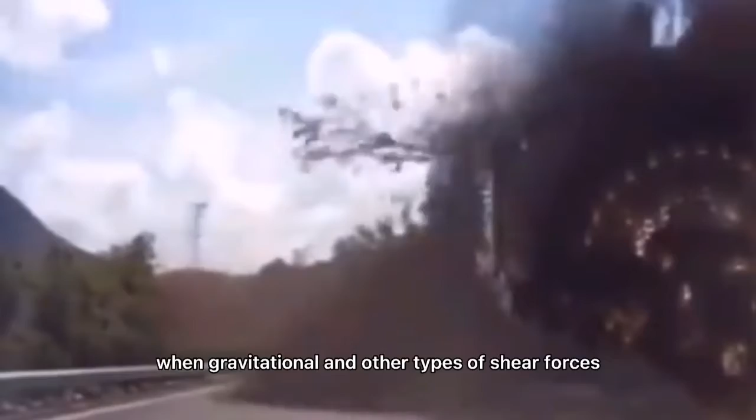Hi, my name is Nasamhana binti Sabri, and we will show you a video about landslide. A landslide, also known as a landslip, is the movement of a mass of rock, rubble, earth, or soil downslope. Landslide can occur when gravitational and other types of shear forces within a slope exceed the shear strength of the materials that made up the slope.

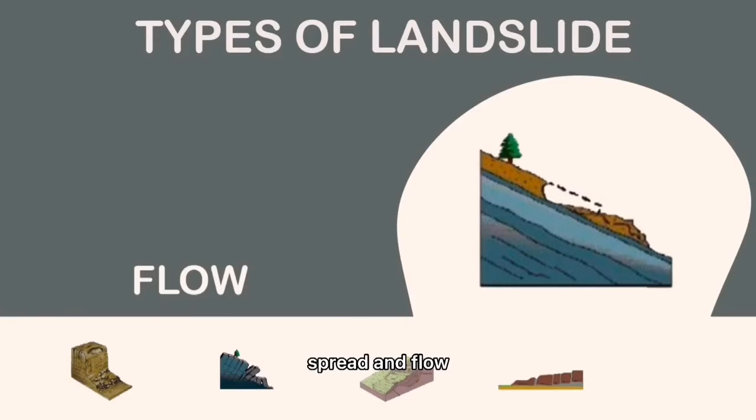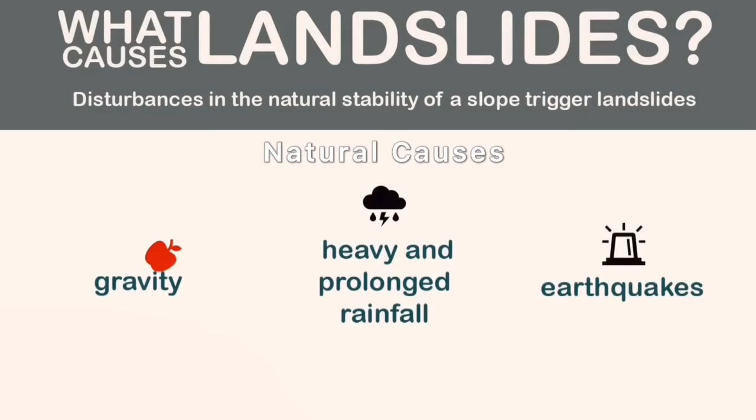Types of landslide: fall, topple, slide, spread, and flow. What causes landslide? Disturbance in the natural stability of a slope triggers landslide. There are two causes of landslide: natural causes and human causes. Natural causes: gravity. On steeper slope, gravity is more powerful.

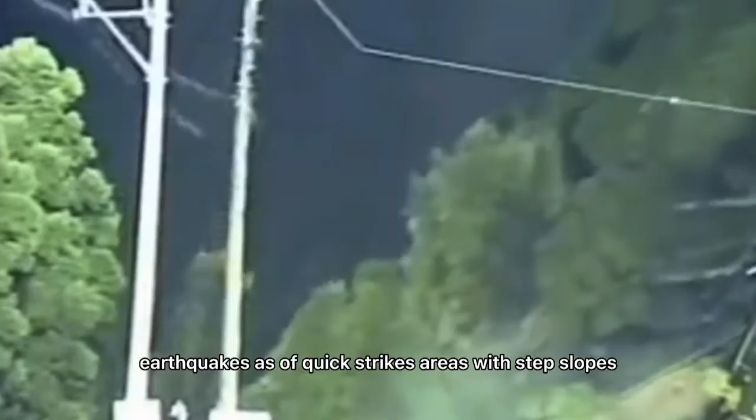Heavy and prolonged rainfall. Landslides are more likely to occur when there is a zone of vulnerability created by the storm and water level rises, making some slope unstable. Earthquakes. As earthquake strikes areas with steep slopes, the soil sometimes slips, resulting in landslides.

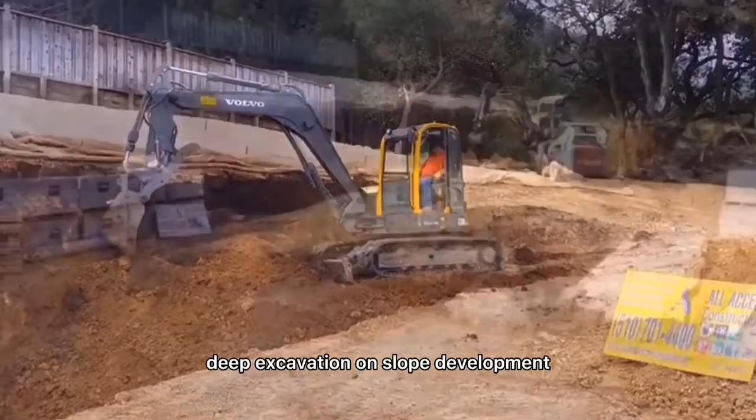Anthropogenic factor or human causes. Inadequate drainage system. Natural drainage lines on slope are blocked by contour bunding used to prevent soil erosion, but without adequate surface drainage of excess stormwater, landslides become more likely. Deep excavation on slope. Development activities such as building construction and cut-and-fill structure cause natural slope to be changed, which contribute to critical slope vulnerability.

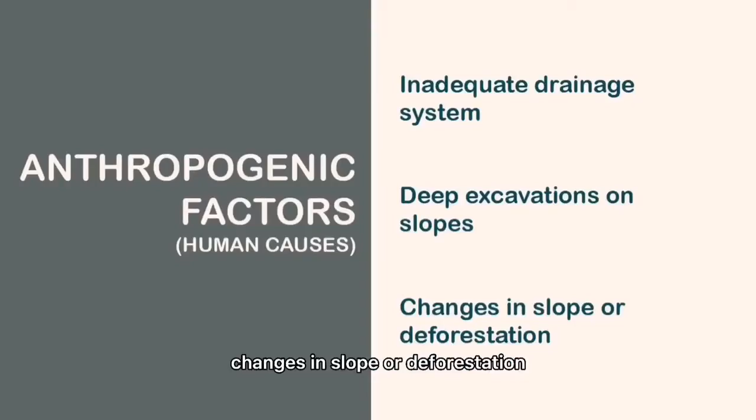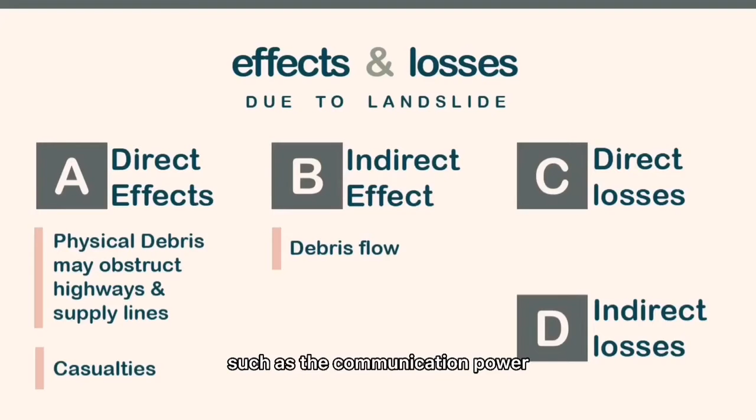Changes in slope or deforestation. Improper land use practices like heavy tilling, farming practices, and settlement patterns have led to creep and the loss of toe support. Effect and losses due to landslides. Direct effects. Physical debris may obstruct highway and supply lines, such as telecommunication, power, water, and other utilities. Casualties. Death and accidents to human and animals.

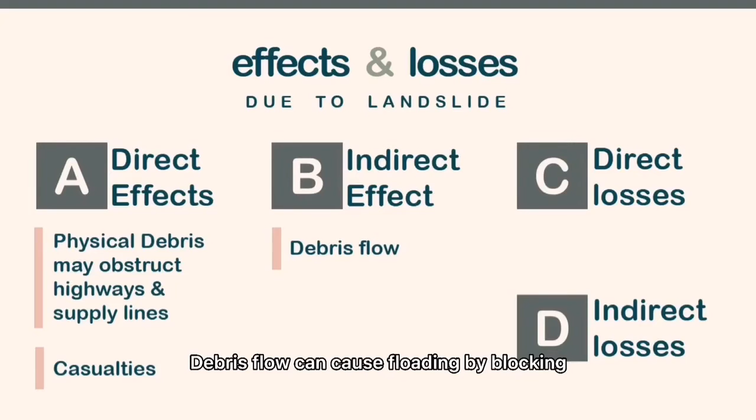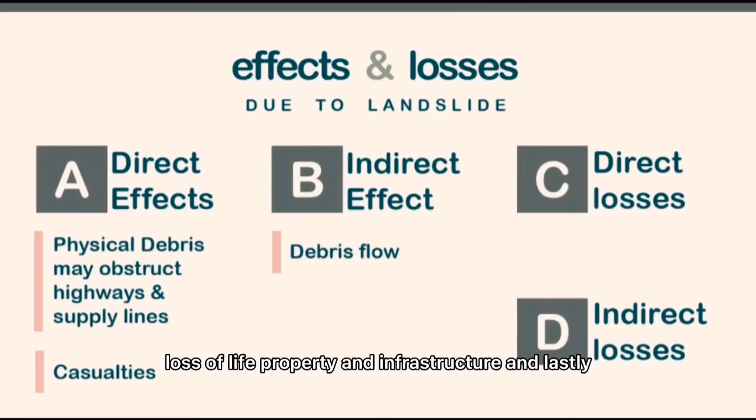Next, indirect effect. Debris flow can cause flooding by blocking streams' channels, causing a large volume of water to back up and cause a flash flood. Moreover, direct losses. Loss of life, property, and infrastructure. And lastly, indirect losses. Decrease in forest land and in human productivity.

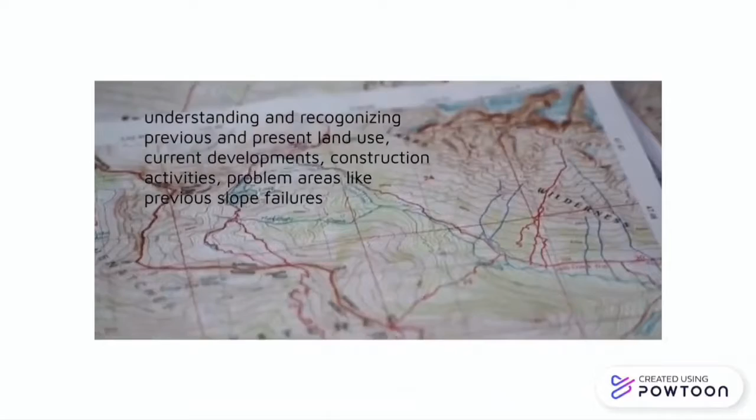By reviewing the topography of the site, builders will understand the previous and present land use, current developments, construction activities, and problem areas like previous slope failure. A properly planned subsurface investigation would allow the builders to know the condition of the whole slope.

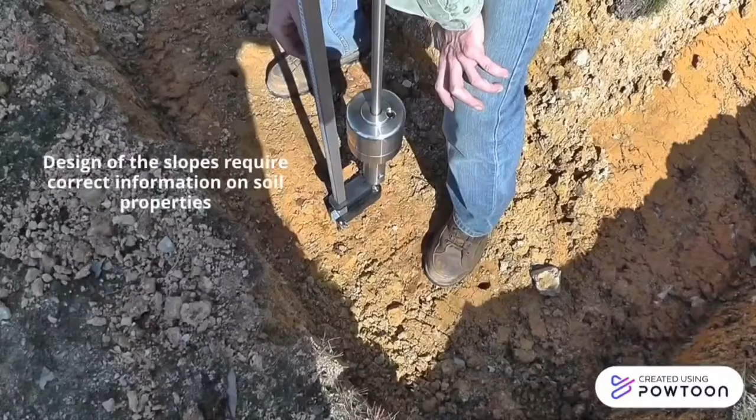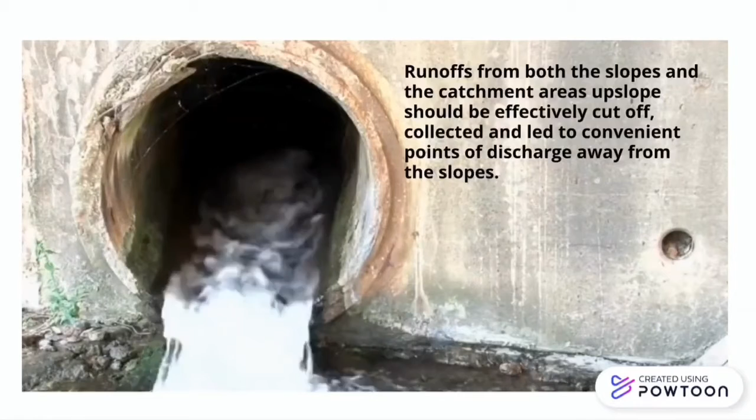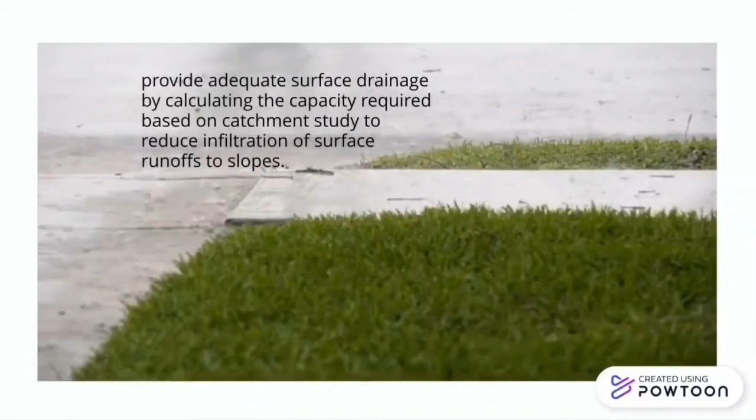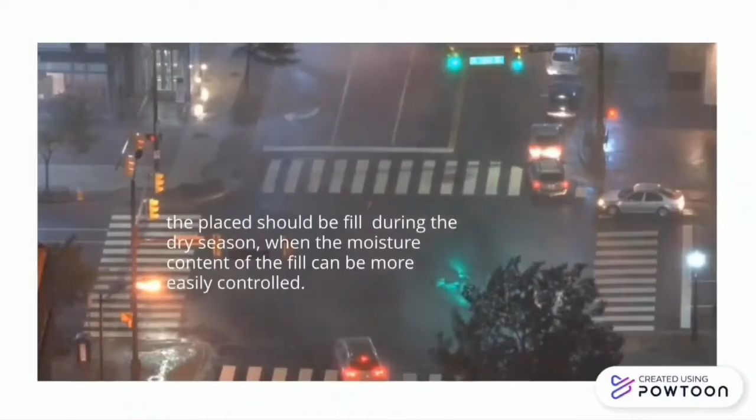Surface drainage and protection are necessary to maintain the stability of the design slope through reduction of infiltration and erosion caused by heavy rain. Runoff from both the slope and the catchment area upslope should be effectively cut off, collected, and led to convenient point of discharge away from the slope. Cutting of slope is carried out from top down, followed by works like drain and close turfing.

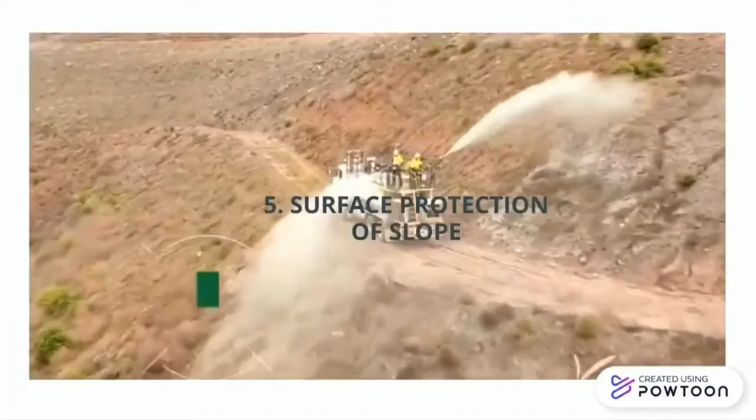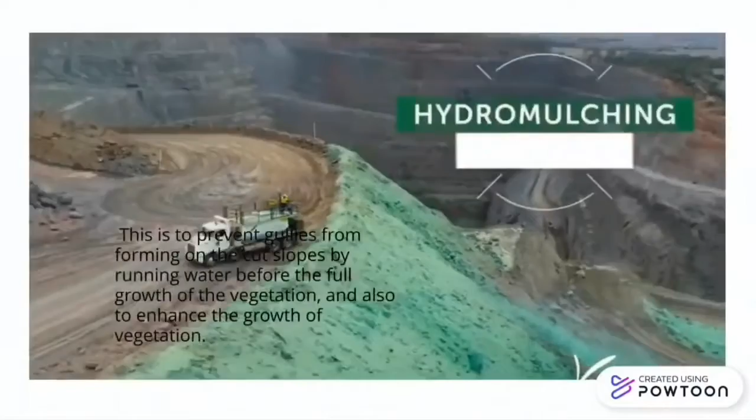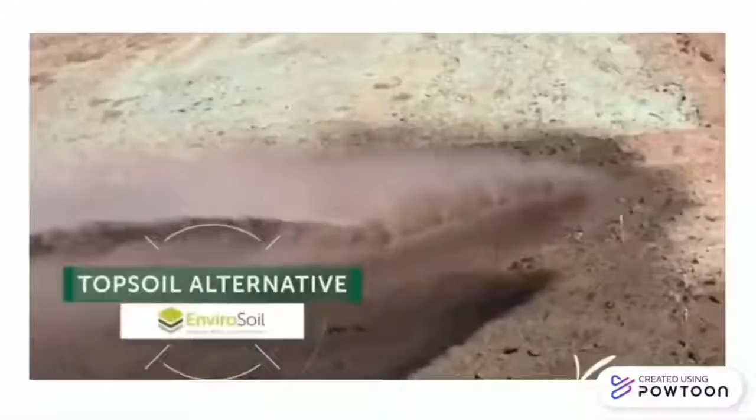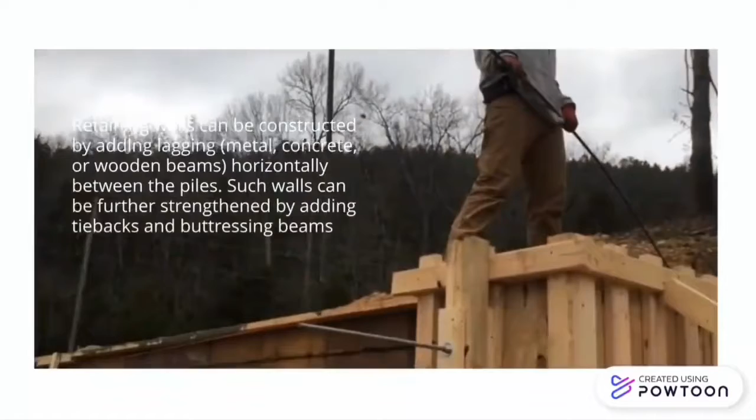For all exposed slopes, protection such as close turfing or hydroseeding should be carried out. All cut slopes should be graded to form horizontal grooves using suitable motor graders before hydroseeding. Retaining walls are structures designed to restrain the soil. They are normally used in areas with steep slopes or where the landscape needs to be shaped severely for construction or engineering projects.

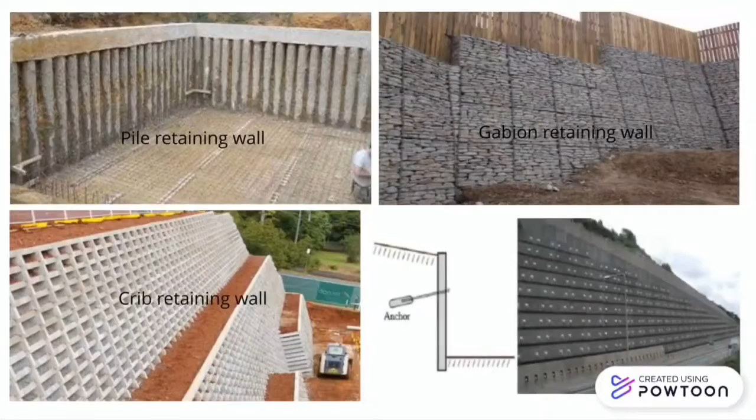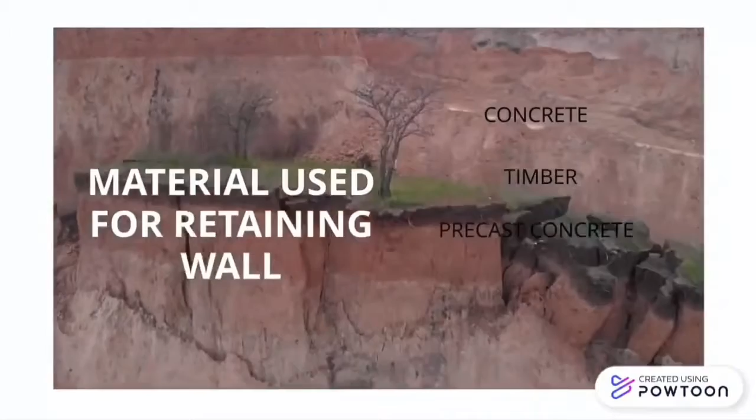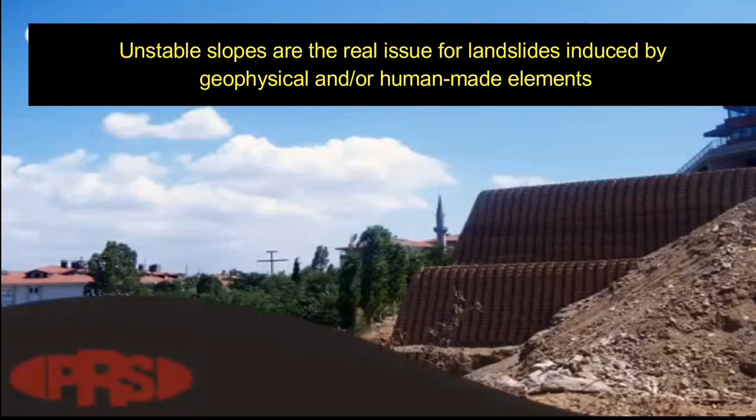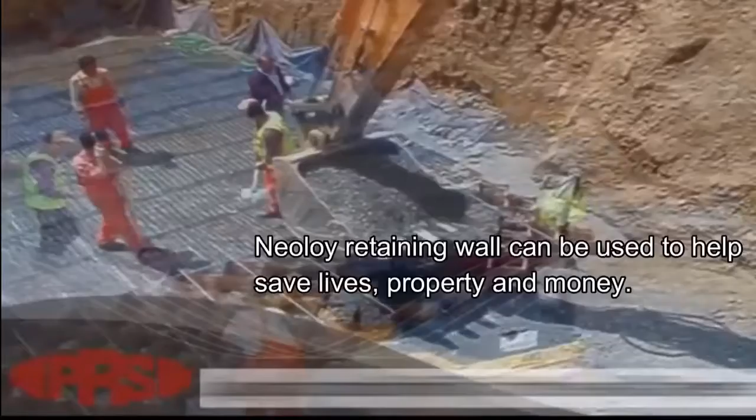Next is benefits. The first one is the benefits of installation of retaining walls. Unstable slopes are the real issue for landslides induced by geophysical and or human-made elements. Neoloy retaining walls can be used to help save lives, property and money. Neoloy retaining walls and structures can be built down from the ground failure lines and uphills along with unstable and or steep slopes where water runoff results in hillside erosion.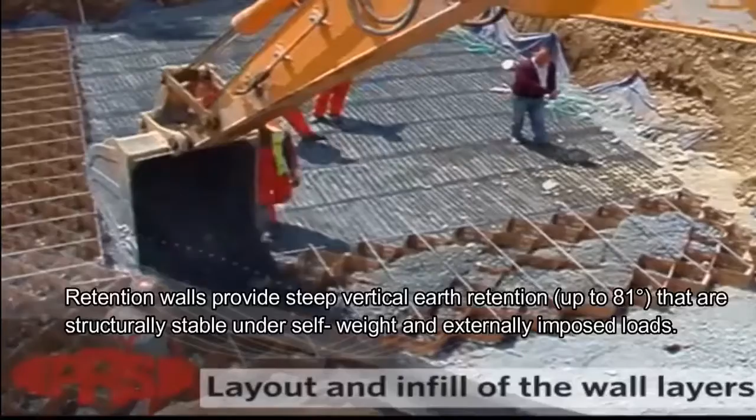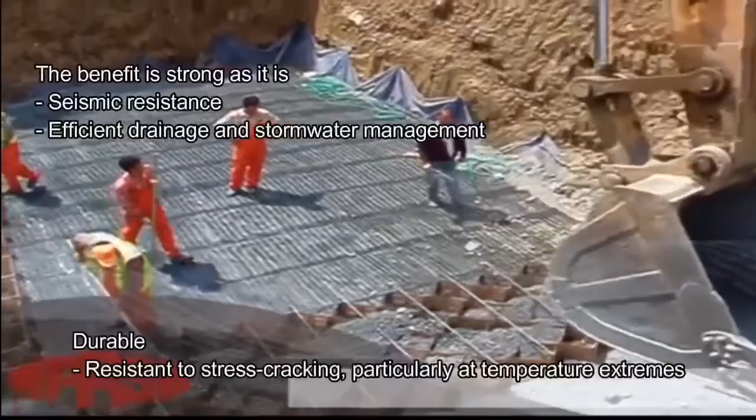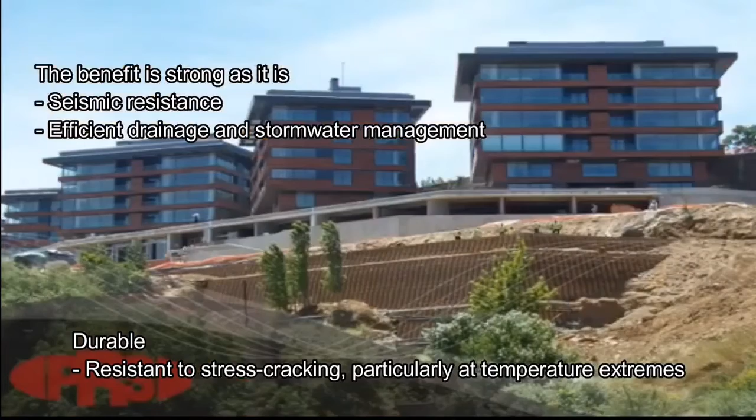Retaining wall also provides structural stability under self weight and external imposed load. Maintain structural stability even in compressible and unstable foundation subgrades or under seismic loading. The benefit is strong as it is seismic resistant, efficient drainage and stormwater management, also durable, resistant to stress cracking, particularly at temperature extremes. It also functions as slope stabilization and steep and high ground stability for unstable slopes.

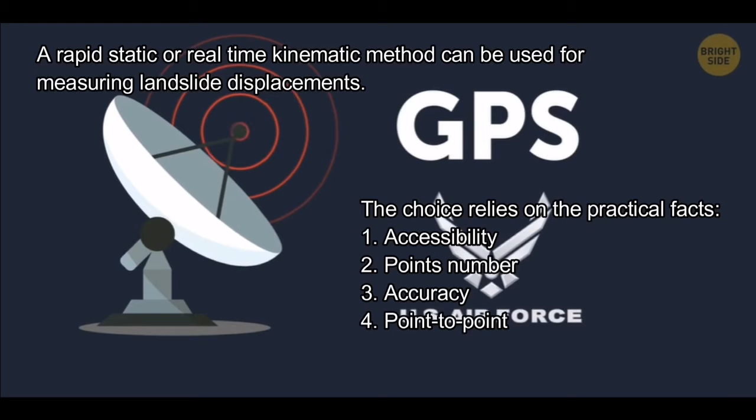Second is the benefit of using technology to detect landslide. GPS stands for Global Positioning Systems. Using GPS technology, the magnitude, direction of the slide and the boundary of the landslide block can be determined. A rapid static or real-time kinematic method can be used for measuring landslide displacement. The choice relies on the practical facts: first, accessibility, second, point number, third, accuracy, and fourth, point-to-point distance.

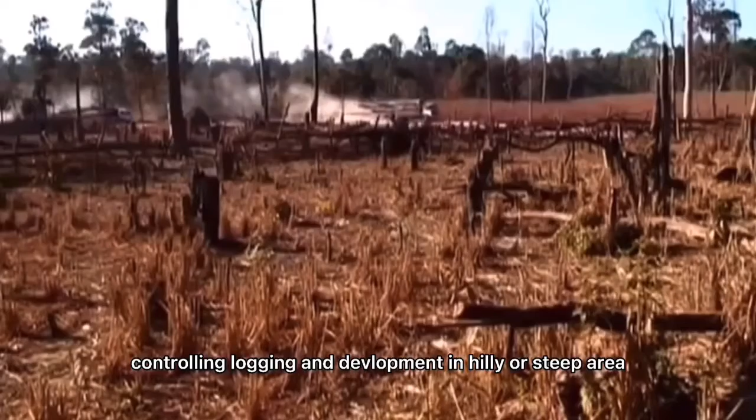Challenges. These are the challenges faced by JKR or PWD. Control. Controlling logging and development in hilly or steep area. Prevent. They have to prevent other parties from illegal hill clearing. And requirements. They will face challenges when the other party doesn't follow the requirements of slope design. The other challenge is natural causes.

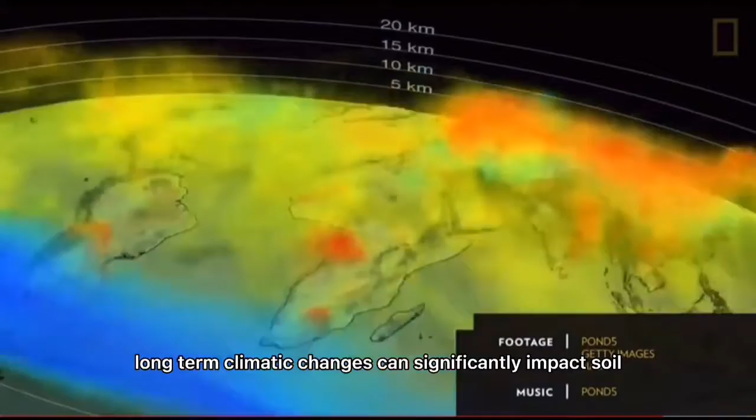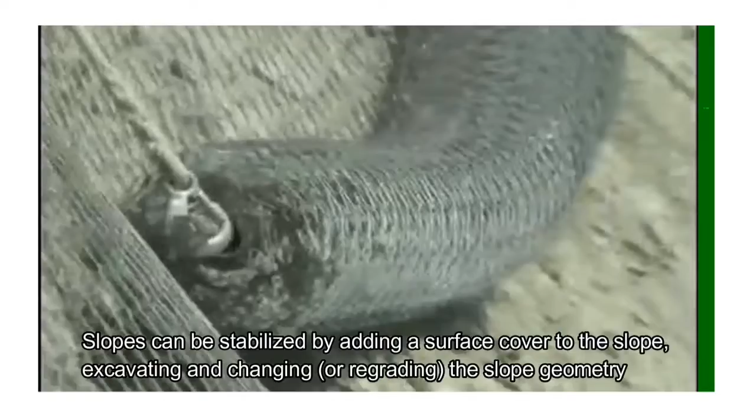Weathering. Weathering is the natural procedure of rock deterioration that leads to weak landslide susceptible materials. Climatic. Long-term climatic changes can significantly impact soil stability. Next is maintenance. First is reinforced stabilized soil wall. Slope can be stabilized by adding a surface cover to the slope, excavating and changing or regrading the slope geometry.

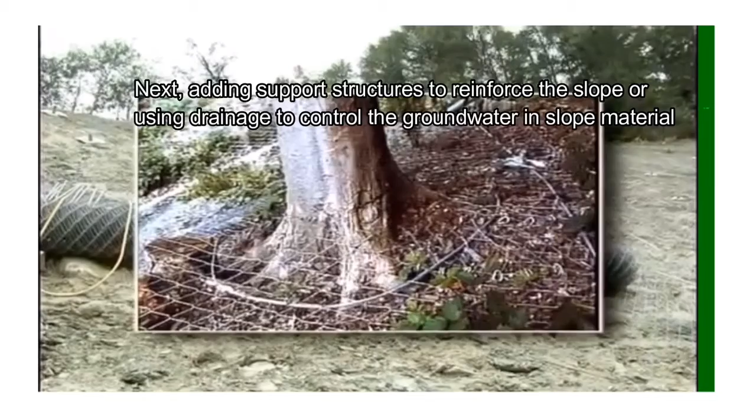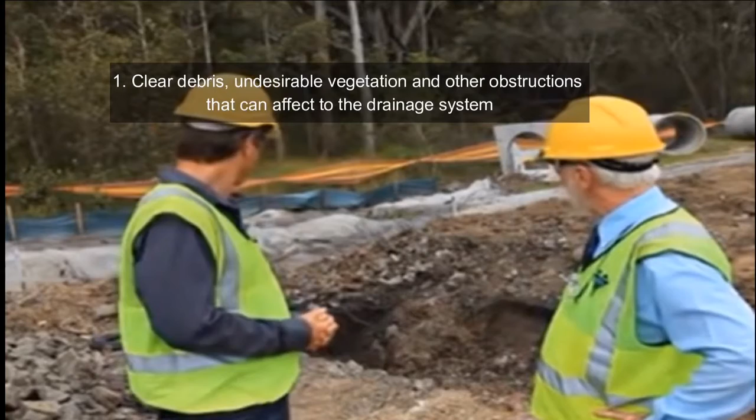Next, adding support structures to reinforce the slope or using drainage to control the groundwater in slope materials. Second, surface drainage channels, sumps and silt traps. The step is to clear debris, undesirable vegetation and other obstructions that can affect the drainage system. Then immediately rebuild the cracked or damaged channel.

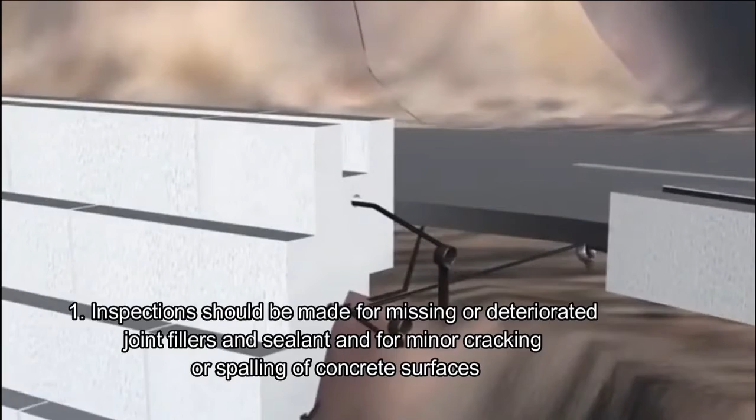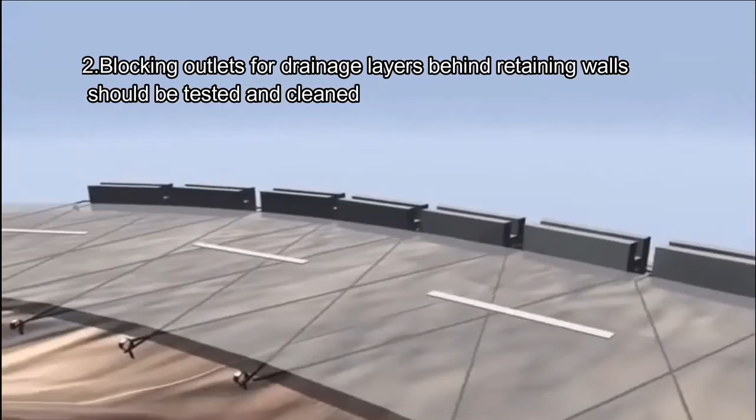Third is retaining structures. First, inspection should be made for missing or deteriorated joint fillers and sealant and for minor cracking or spalling of concrete surfaces. Blocked outlets for the drainage layer behind retaining walls should be tested and cleaned. During retaining wall inspection, symptoms of distress such as settlement and tension cracks in the ground near the retaining wall, and severe cracking, should be recorded.

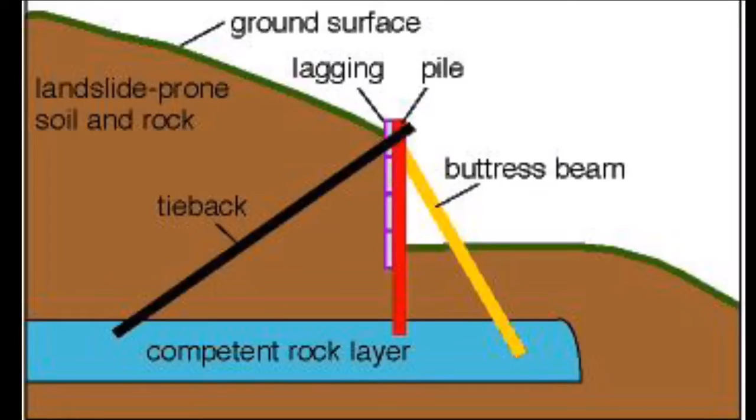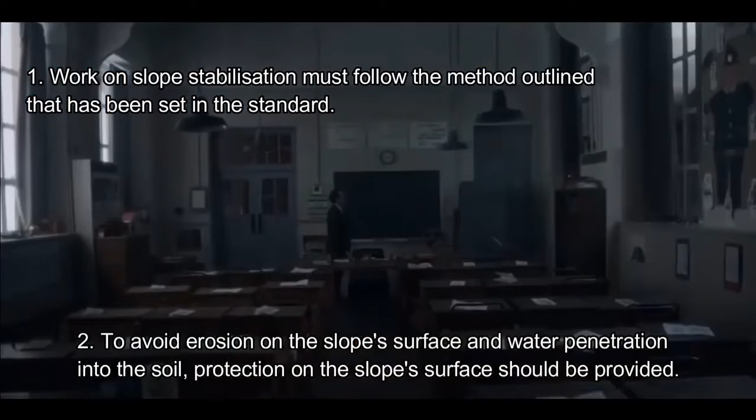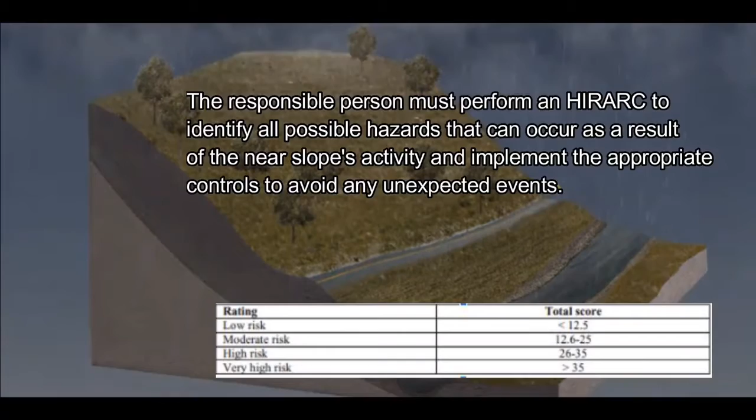Next is safety and health. First, work on slope stabilization must follow the method that has been set in the standard. Second, to avoid erosion on the slope surface and water penetration into the soil, protection on the slope surface should be provided. The responsible person must perform a HIRARC to identify all possible hazards that can occur as a result of the near-slope activity and implement the appropriate control to avoid any unexpected events.

Here are some tips when a landslide happens. First, know the hazard area and the evacuation plan. Second, during the incident, stay alert, and after, stay away from the affected area and check for injured persons.

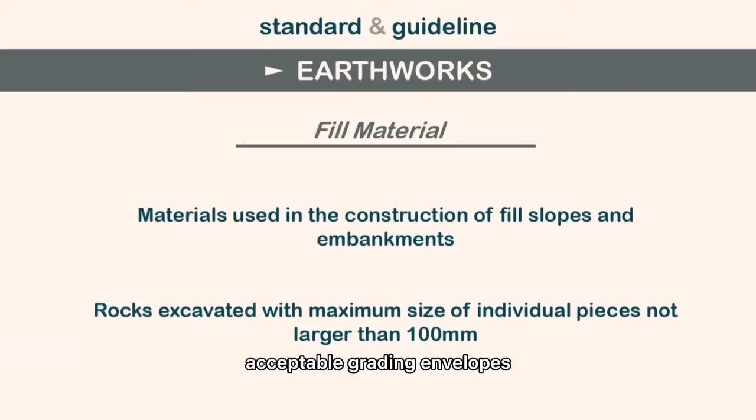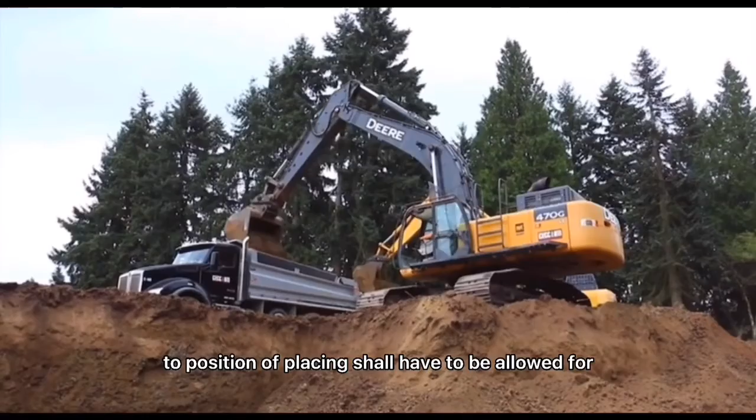Standards and guidelines. Materials used in the construction of fill slopes and embankments shall, if suitable, as far as possible be excavated from adjacent cuts. Rocks excavated from the cuts may be used as fill materials if they are crushed to acceptable grading envelopes, with the maximum size of individual pieces not larger than 100 mm. Drying out of the fill material during hauling and handling from cut to position of placing shall be allowed for.

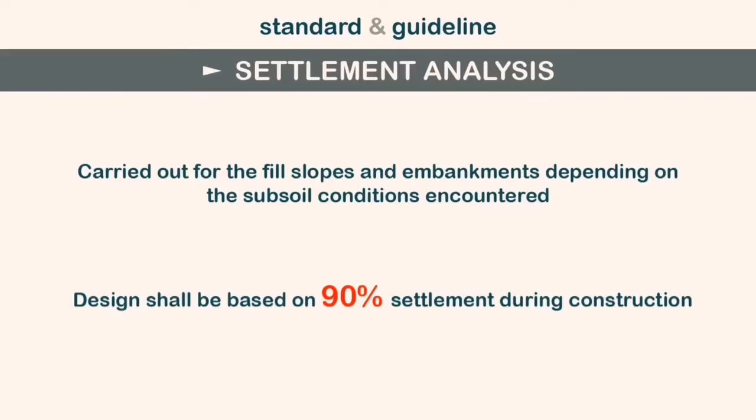Settlement analysis. It is carried out for fill slopes and embankments depending on the subsoil condition encountered. Design shall be based on 90% settlement during construction. If ground improvement methods are used, the settlement analysis will consider the type of ground improvement method used.

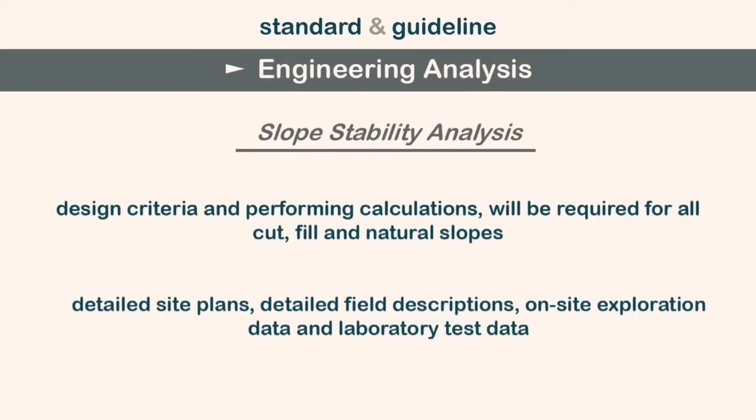Engineering analysis, slope stability analysis. This is included in the design criteria, and performing calculations will be required for all cut, fill and natural slopes. The data will be based on the detailed site plans, detailed field descriptions, on-site exploration data and laboratory test data. In performing any analysis, the worst possible condition must be utilized.

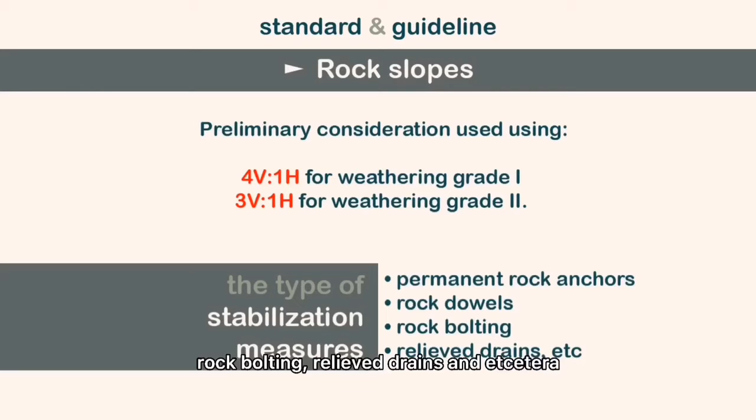Rock slopes. Preliminary consideration can use 4 vertical to 1 horizontal for weathering grade 1, and 3 vertical to 1 horizontal for weathering grade 2. If the analysis is unstable, it shall be designed to a better gradient. The type of stabilization measure can be one of the following: permanent rock anchors, rock dowels, rock bolting, relief drains, etc.

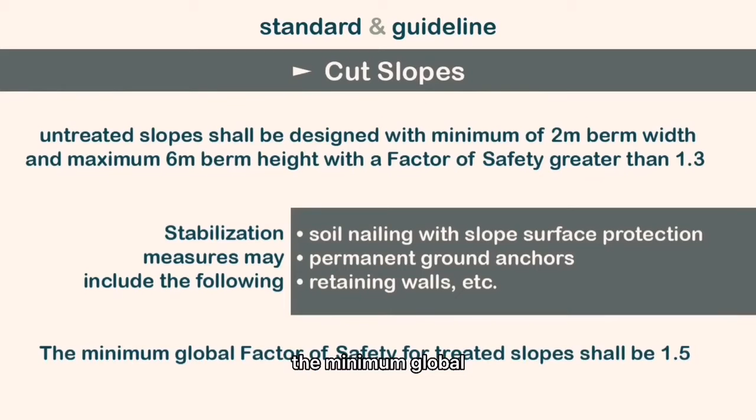Cut slopes. All untreated slopes shall be designed with a minimum 2 meter berm width and a maximum 6 meter berm height, with a factor of safety greater than 1.3. Stabilization measures may include soil nailing with slope surface protection, permanent ground anchors, retaining walls, etc. The minimum global factor of safety of treated slopes shall be 1.5.

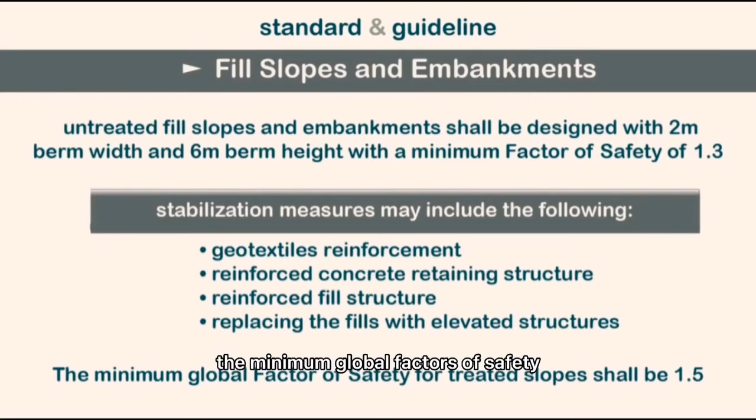Fill slopes and embankments. All untreated fill slopes and embankments shall be designed with 2 meter berm width and 6 meter berm height with a minimum factor of safety of 1.3. Stabilization measures may include geotextile reinforcement, reinforced concrete retaining structures, reinforced fill structures, or replacing the fill with elevated structures. The minimum global factor of safety for treated slopes shall be 1.5.

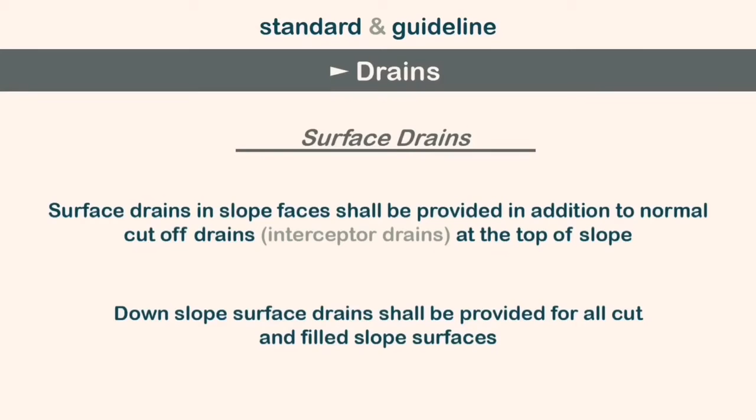Drains. Surface drains. Surface drains on slopes shall be provided in addition to normal cut-off drains, and interceptor drains at the top of slope. Downslope surface drains shall be provided for all cut and fill slope surfaces. The drains shall be cascade drains with handrails for ease of maintenance in the future. All surface drains shall be cast in situ and designed to follow guidelines for road drainage design.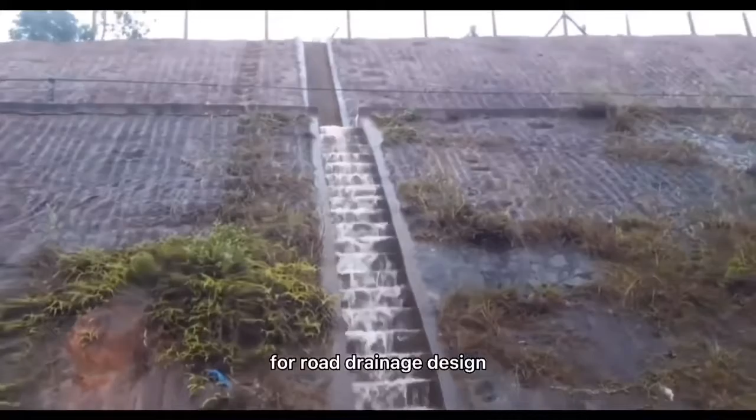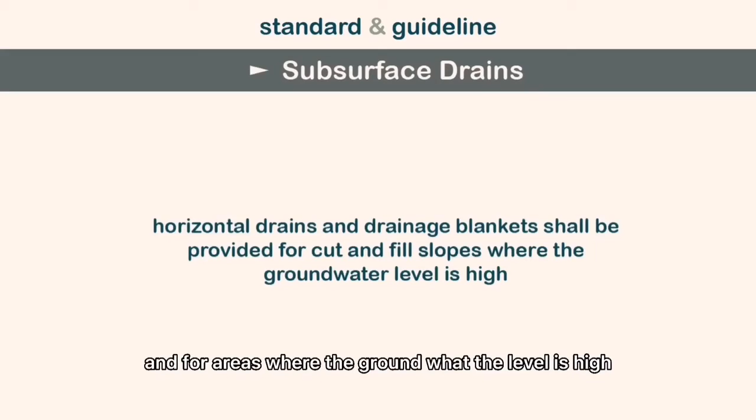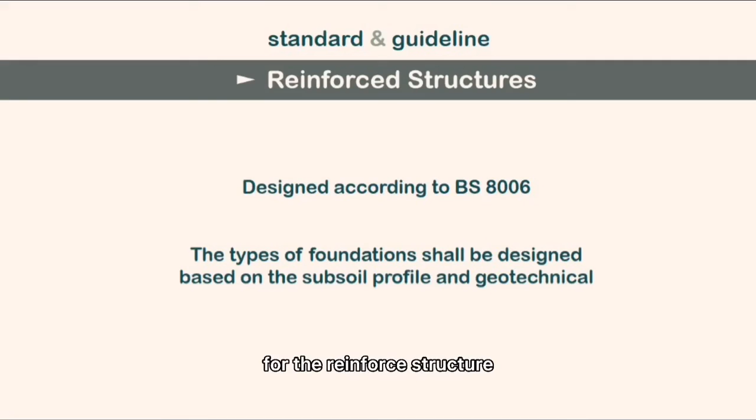Subsurface drains. Horizontal drains and drainage blankets shall be provided for cut and fill slopes and for areas where the groundwater level is high. Reinforced structure. Reinforced structures shall be designed according to BS 8006. The type of foundation for the reinforced structure shall be designed based on the subsoil profile and geotechnical properties of the footing subsoil at each location.

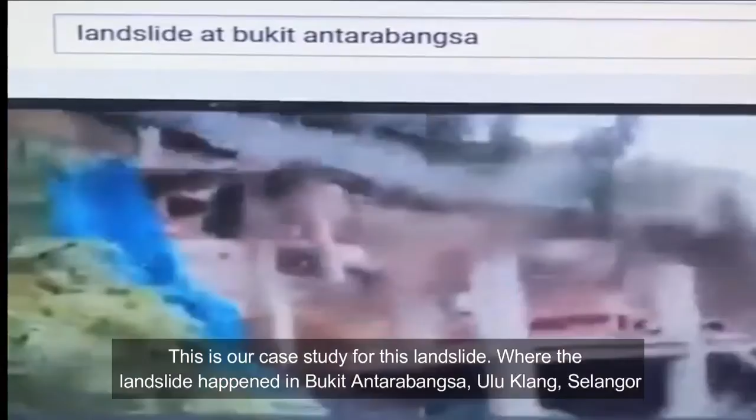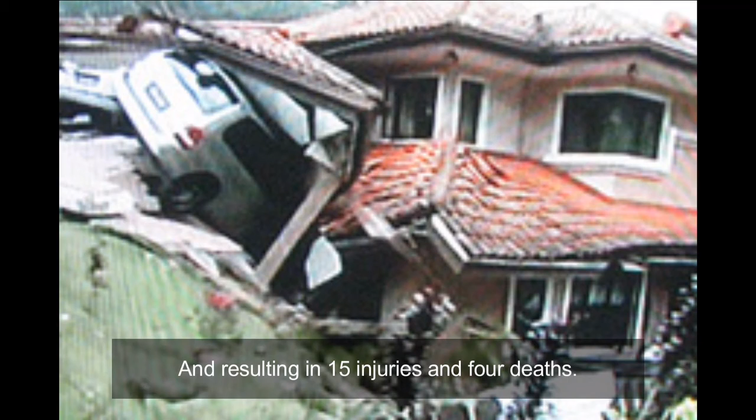This is our case study for this landslide, which happened in Bukit Antarabangsa, Ulu Klang, Selangor. It happened in December 2008, burying 14 homes in Taman Bukit Mawar and Taman Bukit Utama, and resulting in 15 injuries and 4 deaths. This tragedy happened because of soil creep due to non-engineered fill on the slope, which developed tension cracks over the area. Moreover, a pipe burst and leaking water in the nearby area built up water pressure in the soil pores and triggered the landslide.